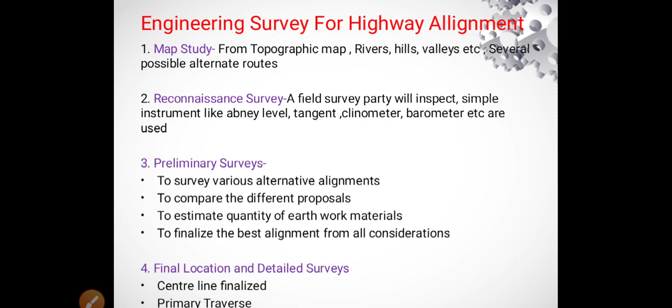Friends, today we will understand about engineering survey for highway alignment.

The engineering survey can be conducted in different stages, starting from map study, reconnaissance survey, preliminary survey, final location and detailed surveys. These are the four stages.

Map study from the topographic map itself, by sitting in the office, we can observe the rivers, hills, valleys, etc., and possible alternate routes can be sorted out.

Reconnaissance survey: a field survey party will inspect with simple instruments like Abney level, tangent clinometer, barometer, etc. That's why it is called a rapid visual survey. Whatever details we have seen on the map, we have to make sure that they are true. That sort of visual inspection and observation rapidly will be done during reconnaissance survey, which is why minor instruments are used.

Preliminary surveys: to survey various alternative alignments proposed by reconnaissance survey based on the map study also, to compare the different proposals with respect to difficulties, easiness, length of alignment, etc., and to estimate the quantity of earthwork materials. Based on these proposals on alternative alignments, estimation is done so as to make the alignment feasible and economical. To finalize the best alignment from all considerations, preliminary surveys are necessary.

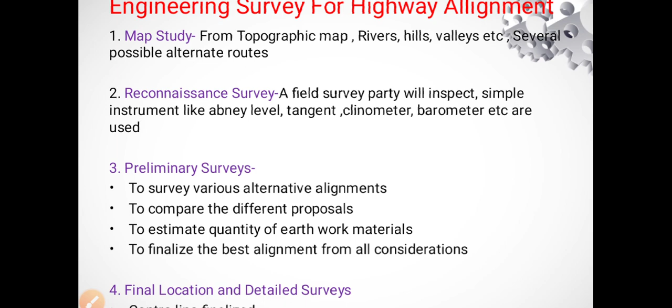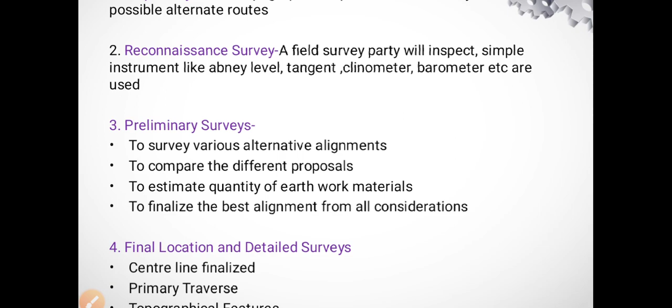Next, final location and detailed survey. Center line finalized, primary traverse.

Now, preliminary survey. The main objectives are to survey the various alternate alignments proposed after reconnaissance and to collect all necessary physical information and details of topography, drainage, and soil. Second objective: to compare the different proposals in view of the requirements of a good or ideal alignment, whether they fulfill all those requirements: short, easy, safety, and economy.

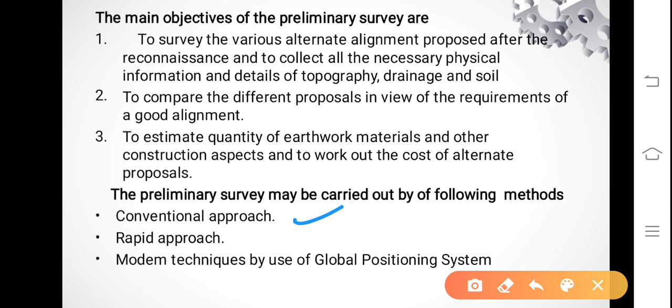In order to estimate the quantity of earthwork materials and other construction aspects and to work out the cost of alternate proposals, the preliminary survey may be carried out by conventional approach or rapid approach using modern techniques such as the global positioning system. We will see only the conventional approach.

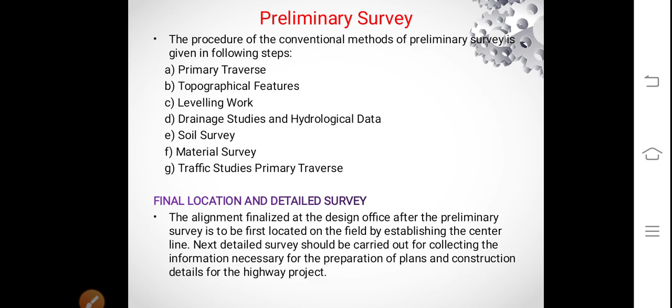The procedure of the conventional methods of preliminary survey are given in the following steps: first, primary traverse; second, topographical features, leveling work using dumpy level, drainage studies and hydrological data, soil survey, material survey, and traffic studies; and primary traverse.

Next, final location and detailed survey. The alignment finalized at the design office after the preliminary survey is to be first located on the field by establishing the center line. So first of all, the center line is drawn along the alignment at frequent intervals of 25 to 30 meters. Stout posts or pegs are to be driven for further leveling works.

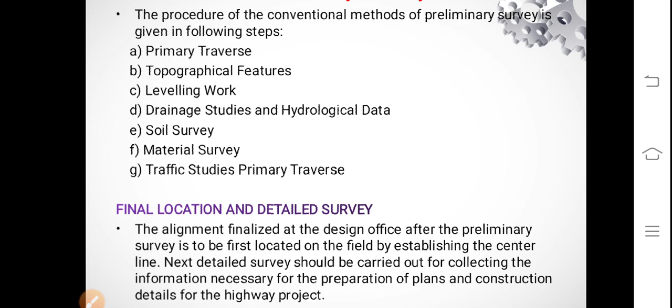Next, detailed survey should be carried out for collecting the information necessary for the preparation of plans and construction details for the highway project. Detailed survey.

Temporary benchmarks are fixed. This is done by means of fly levels carried out from the nearby railway station or wherever GTS benchmarks are available nearer to that particular site, and then leveling work is carried out.

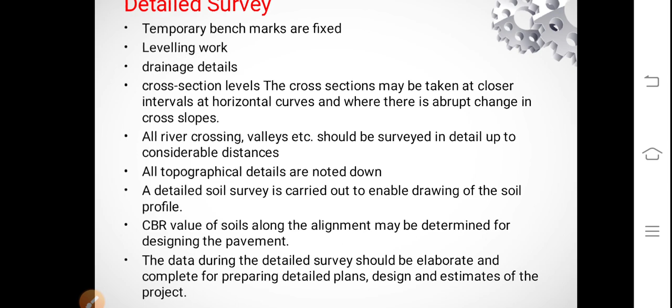Drainage details, cross-section levels. The cross-sections may be taken at closer intervals at horizontal curves and where there is an abrupt change in cross slopes, so the interval of levels taken is closer there.

All river crossings, valleys, etc. should be surveyed in detail up to considerable distances. All topographical details are noted down. A detailed soil survey is carried out to enable drawing of the soil profile. CBR value of soils along the alignment may be determined for designing the pavement.

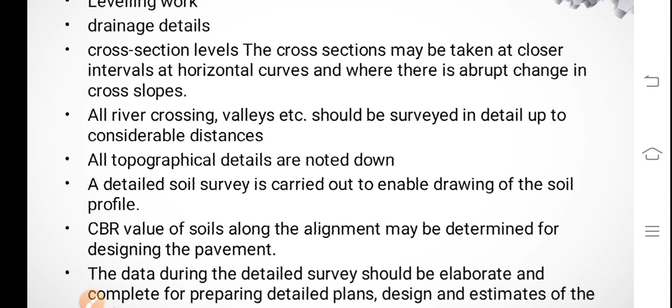The data during the detailed survey should be elaborate and complete for preparing the detailed plans, design and estimates.

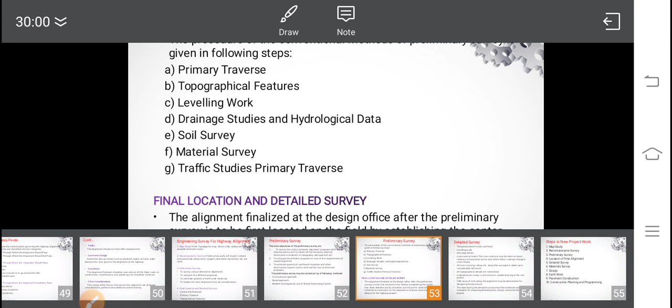Now the various steps in new project work: map study, reconnaissance survey, preliminary survey, location of final alignment, detailed survey, materials survey, design, earthwork, pavement construction, construction planning and programming.

So even in new project work, whatever you have studied earlier: map study, we can immediately identify the obligatory points which are coming across the alignment in the office itself. Reconnaissance survey is done to make sure that those details are existing or not, because usually the maps are prepared at least once in 10 years.

So during that elapsed 10-year period, if any new structures or new developments have taken place in that location, they might not have appeared on the map during the study in the office. So that is to be verified physically.

Preliminary survey, as usual, location of final alignment and detailed survey should be carried out by proper leveling, so as to prepare various longitudinal leveling, profile leveling and cross sections, especially typical cross sections where the undulations are more.

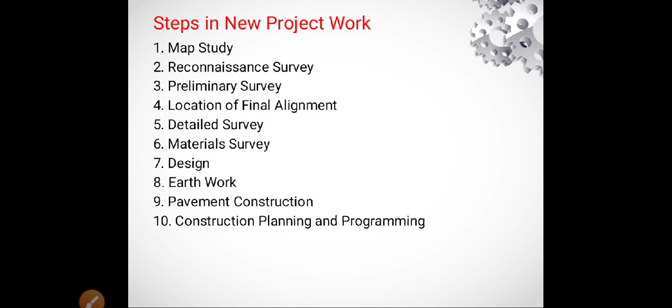And then drawings and reports are to be prepared. What are the various drawings? On drawings, we have to show the key map; proposed and existing roads and important places to be connected are to be shown.

Index map showing general topography of the area. Preliminary survey plans, showing various alternative alignments.

Detailed plans: ground plan with alignment and boundaries. Longitudinal sections as per the detailed plan, with levels taken along the center line. Profile leveling is to be done.

Detailed cross sections up to the proposed right of way should be done. Depending upon the type of road, the right of way will vary from type to type: it is very low for a village road and maximum for a national highway.

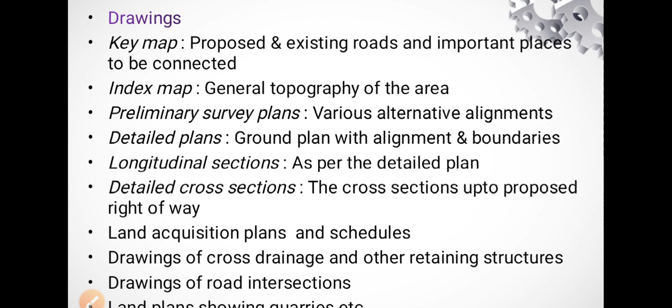Land acquisition plans and schedules should be shown. Drawings of cross drainage and other retaining structures. Drawings of road intersections. Land plans showing quarries, etc.

Drawings and report. So based on the drawings, the report is to be prepared.

General details of the project and its importance. Materials, labor and equipment. Rates, construction programming, etc. So based on the drawings, the report can be prepared.

It should be prepared in such a way that the reasons are given as to why that particular alignment is chosen among the various proposals, in what way it becomes safe, in what way it will be economical, etc. should be highlighted.

And material, labor, and equipment: availability of material, availability of labor, and availability of equipment nearby should be reported.

Rates, as per the schedule of rates, PWD schedule of rates, the engineer has to work out the total cost incurred for survey, the total cost towards materials, the total cost for labor and equipment hiring, and construction programming.

In what way the program is to be planned so that each and every stage of work can be completed well in time.

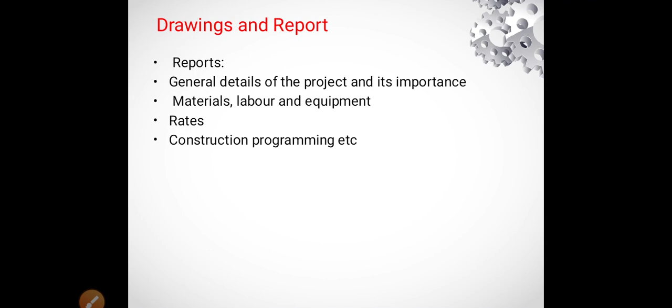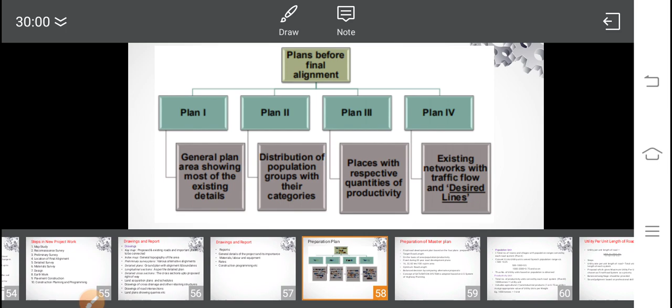So we will see in the next class: plans before final alignment, preparation of master plan, planning surveys, etc.